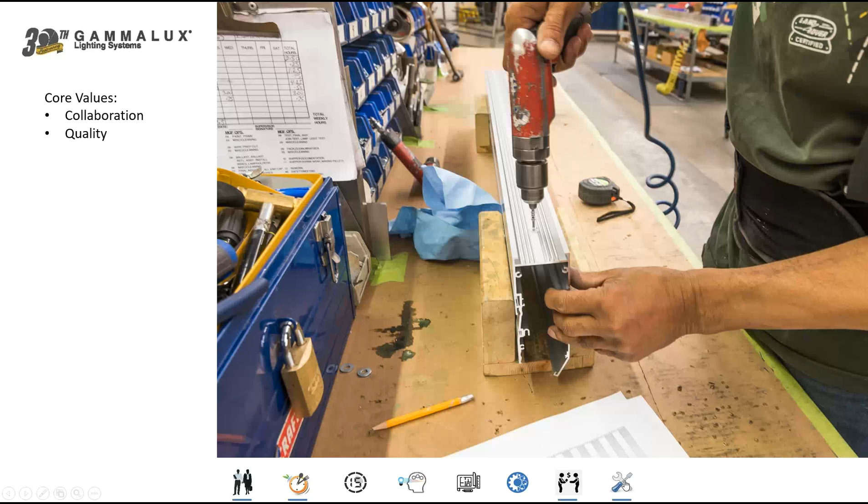Quality, of course, is a very important part of what we do. Obviously, we'll never get the second job if we don't do the first job right. So quality of construction, as well as the type of mounting methods we provide, is also quite important.

And, of course, integrity. Sometimes things go wrong at job sites. Obviously, somebody's going to have to pay for it, but Gammalux needs to be in the very center of those conversations so that we can come up with the best way to solve a problem, whether it's a mounting issue or fixtures not illuminating the way that they should, or aesthetic issues. And certainly, we want to step in and do what we can to minimize the damage on these things.

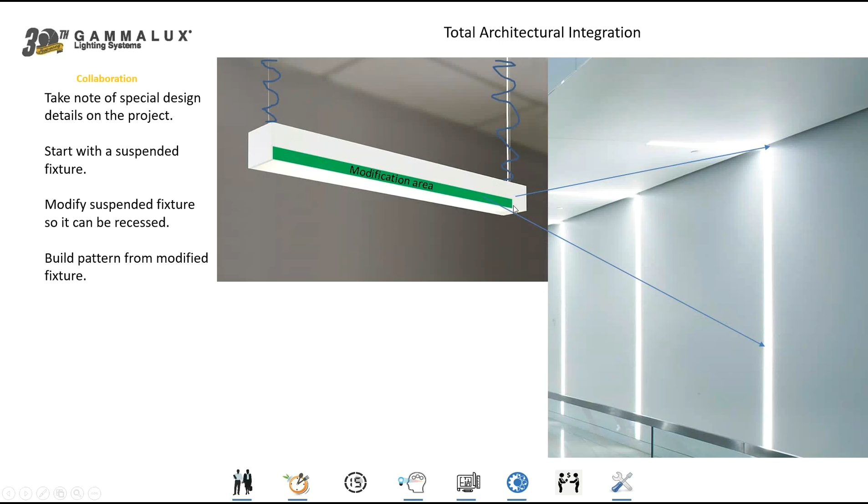So rather than using a recessed fixture in this application, what we actually do is we use a suspended fixture that we've modified just in the area where it's supposed to interface with the wall or the ceiling, but we didn't modify the fixture in the area that was going to be visible inside that little 3-inch gap. So once the fixtures are actually installed into the space, as a person is walking down the corridor and they look at the side of those fixtures, they see the smooth side of what used to be a suspended fixture rather than all the undesirable elements that are visible on the side of a recessed fixture.

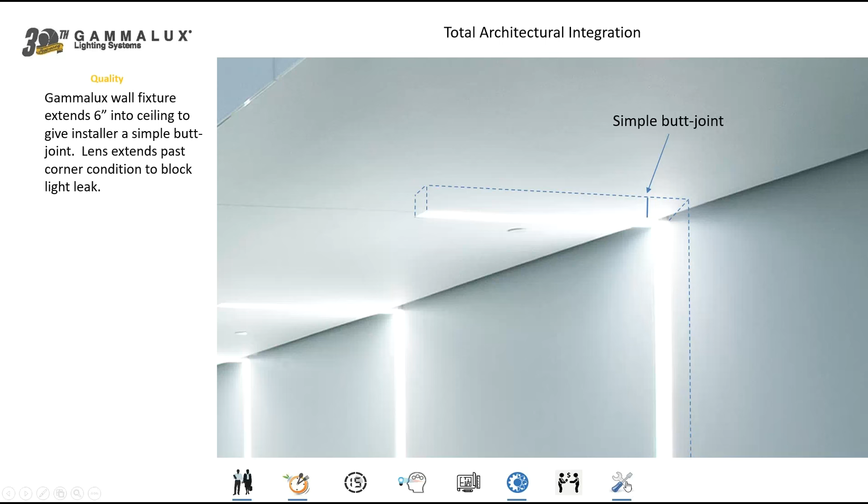By doing that, we're giving the guys in the field the most simple form of installation possible, while still maintaining the original design intent on the job. And so at the end of a job like this, everybody wins. Even though it was a very complex installation, we provided the tools that were necessary and the type of details that the installer needed so that they could actually do good work.

So what it creates is a lot of problems at the job site, of course, and if you don't order it correctly, you've got delays and you've got cost overruns, and this is not the kind of thing that's going to help you build your business. So what we do is we provide a special tool to the designer before the job even goes to bid, called a development drawing.

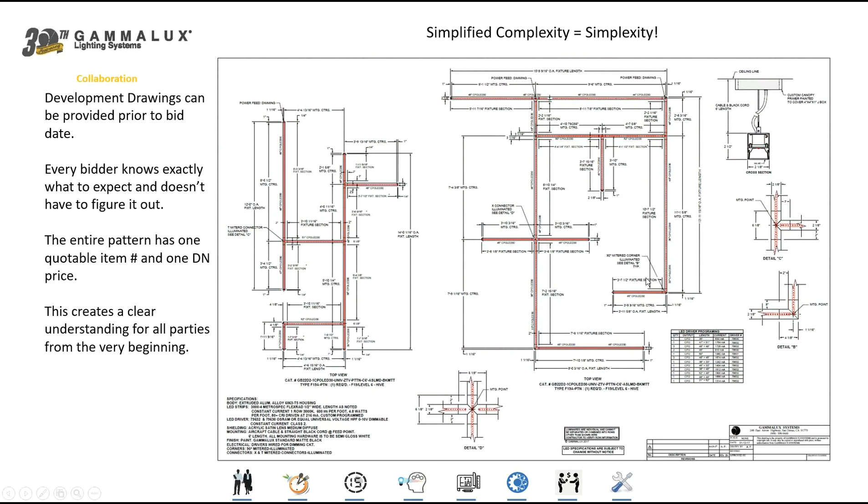We want to provide this development drawing which matches the details of their original design but takes all of that complexity and turns it into one catalog number for the entire pattern of fixtures and one quotable price. This way, when you get a hold of the bid package, you see that this is an engineered lighting system. It's not some kind of a beast that you have to try to figure out how to put it all together. And so by dealing with these patterns in totality in simple terms, like one part number for the whole thing, it actually simplifies the entire process all along the way.

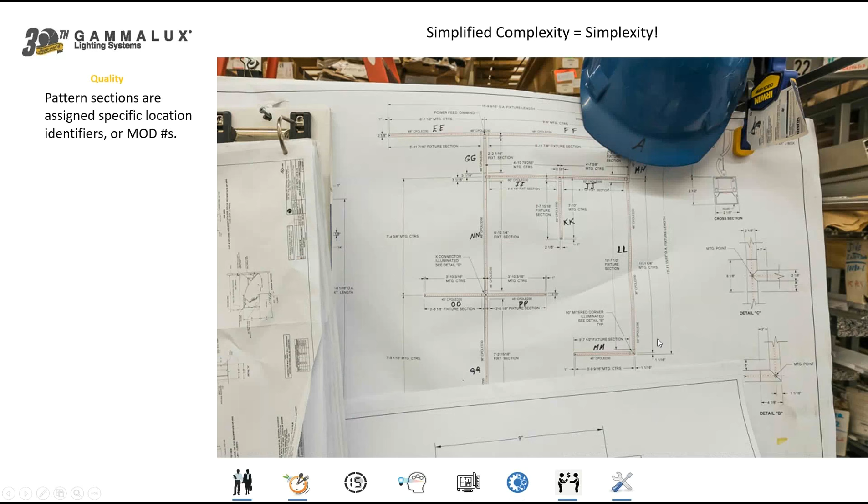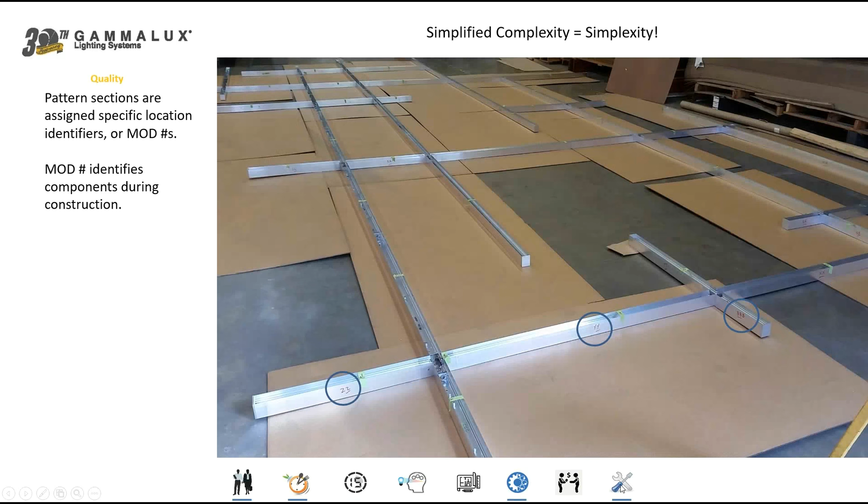Now, because this whole pattern of fixtures is one part number, we have to identify each component within the pattern, so we add these what we call mod numbers or location identifiers. And this mod number follows each component in this pattern throughout the entire production process here at Gammalux. As a matter of fact, everything we build is actually fully assembled twice before we pack it and ship it.

We do this first before it's painted to make sure that all the housings line up properly and the dimensions are correct and the mounting components all work the way that they should. Then we take the entire thing apart, paint it, put in the electrical, and reassemble the entire thing, checking every circuit, every battery pack, the occ sensors, the daylight harvesting sensors, even checking the fit and finish of the paint finish from one housing to the next. So we're very thorough in our methods.

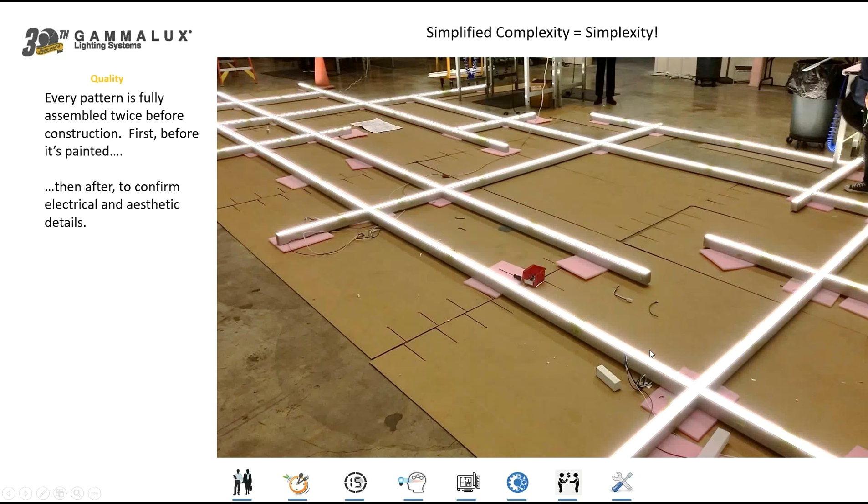And of course this means our lead time is a little bit longer than our competitors, but what we're doing is going through all the procedures necessary to ensure this thing looks and works the way that it should before we ship it out to you at the job site. Now, of course, each component, as I said, has its own mod number, so you'll know exactly where it needs to go. Now, each fixture is actually male on one end, female on the other end. So you don't have the problems of maybe spinning things around and now you're blowing circuits and such. So these fixtures can only be installed one way, which is really nice.

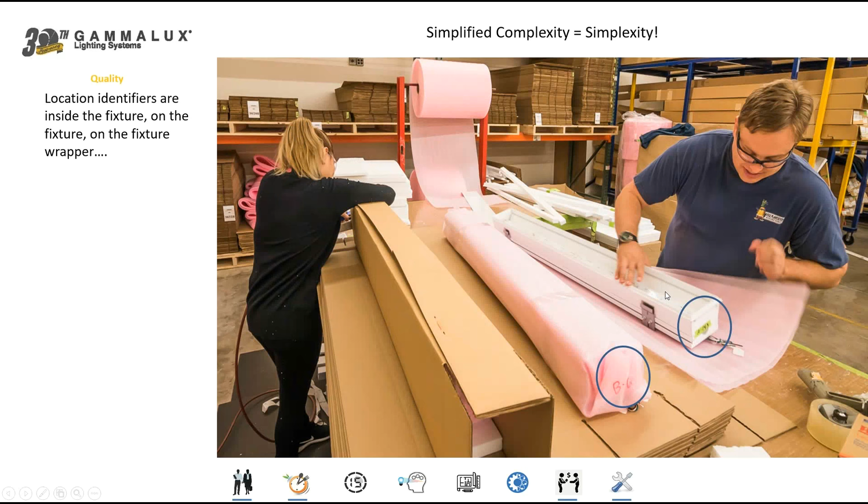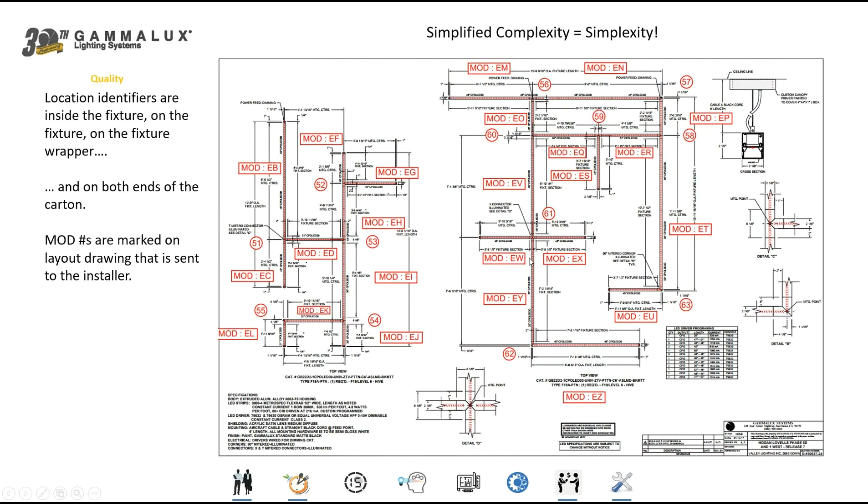Now, in addition to putting that mod number on a little sticker on the inside of the fixture next to the UL label, we also put it on the outside of the fixture, on the bubble wrap, and then on both ends of the carton. So if you're looking at this side of the pallet or that side of the pallet, you can see everything that's on that carton. Also, as much as possible, we actually put all fixtures for the same pattern onto the same pallet. Now, when we ship out those fixtures, of course, we're going to send out a layout drawing, and that drawing also will have those mod numbers added to it as well, so the guys in the field can know exactly where everything goes.

Now, in addition to all the fixtures for a pattern of fixtures, we will also ship all the fixtures for a continuous run of fixtures, again, on the same pallet. So we don't ship all the 4-footers on one day and all the 8-footers on another day, and the hanging parts are shipping out next Tuesday, something silly like that. We ship everything in completion on the same pallet as much as possible, and we'll even pack these for you per floor or per phase, if you like, so that you can keep your guys working as quickly and efficiently at the job as possible and keep them profitable.

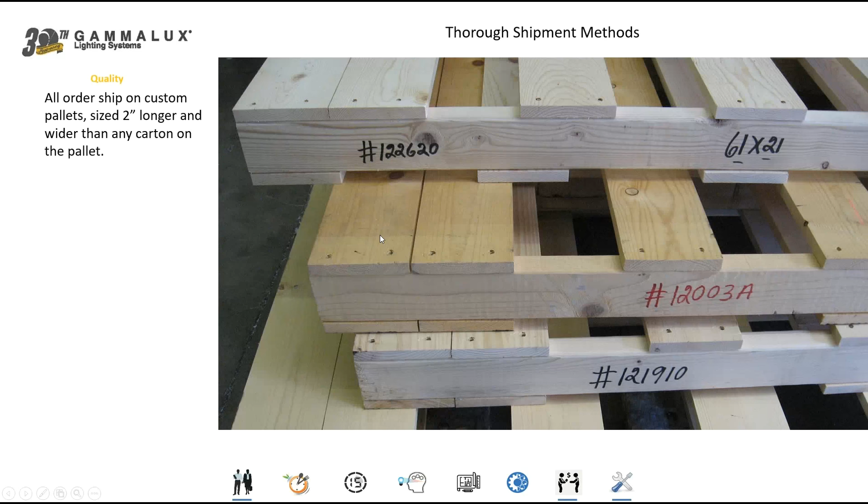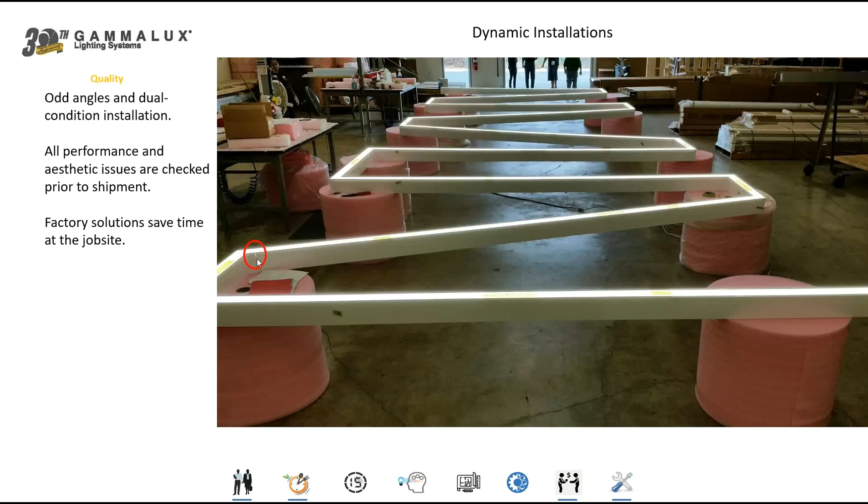Now, every job that we ship actually ships out on a custom-made pallet that's 2 inches longer and wider on all 4 sides than any carton on the pallet. So we do not get shipping damage complaints at Gammalux because of the way that we palletize our fixtures. Now, as I said, everything is built twice because you need to know that we're checking for fine issues like light leak here at the factory before the fixtures arrive on site, because the truth is you don't need to be spending time fixing problems with light fixtures at the job site. This is why we do it at the factory before they even ship.

So for one reason or another, the people who were responsible to order the product didn't order it in time, and that meant that they ran out of time to have the fixtures up in the gyp and then mud them in. So what they decided to do was to have us go ahead and build the fixtures with our cover flange on the bottom at the factory. And while we were building the fixtures, they decided, let's go ahead and put the gyp up, and we're going to cut the slots in the gyp at the same dimension as what Gammalux shows on the factory drawings.

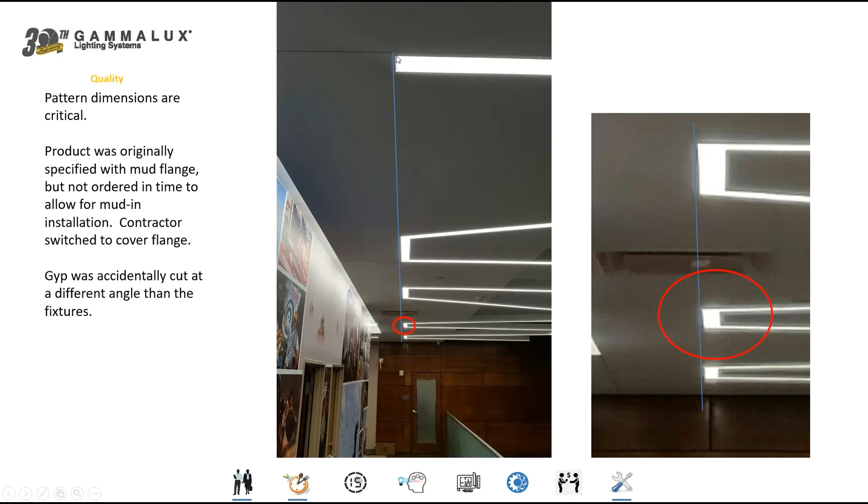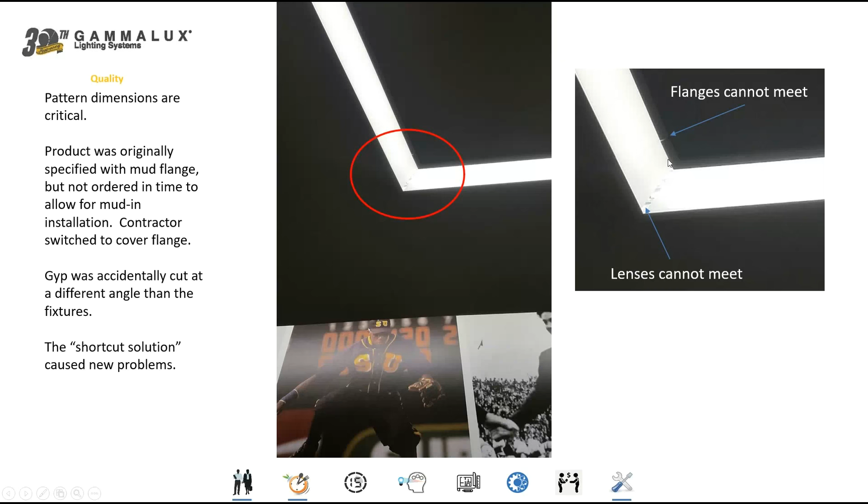Well, in theory that works, but in reality it didn't, and here's exactly what happened. If we draw a straight line, you can see the cutout that they made in the gyp was not the same dimension as what we built for the fixtures. What ends up happening is they had to hyperextend the corner of the fixtures in that location, and that made the lenses unable to join together, and it also created a gap in that flange that they thought was going to be the solution to their problem.

So what we want to do is avoid this kind of thing by working with what we call kind of a reverse timetable. If you can let us know when the product is required on site, then we can let you know by what date we're going to require the signature approvals on our shop drawings. And by doing that, we want to establish a clear understanding for everybody involved and clear expectations so that everybody can actually do their very best work.

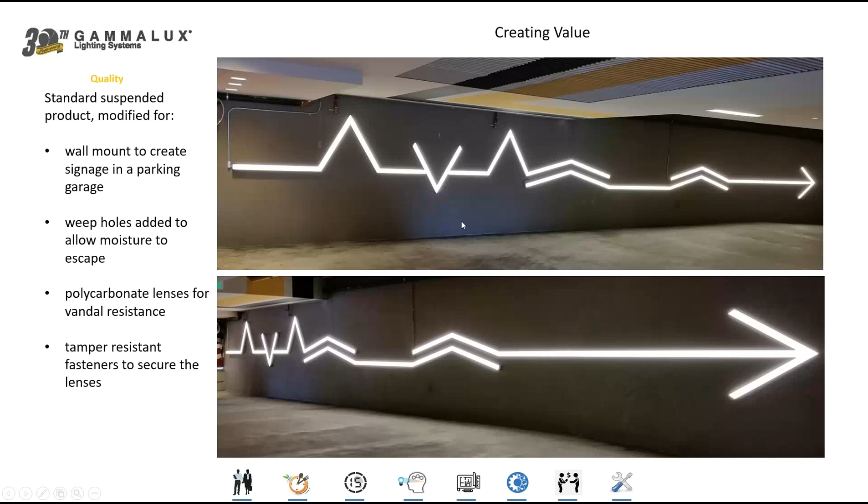Now, this pattern of fixtures here is not a custom pattern of fixtures, and this is not impossible to install. See, when we build a pattern of fixtures like this, we're actually miter cutting and welding these fixtures as L-shaped or V-shaped or T-shaped fixtures at the factory, so the installing contractor doesn't have to put together all these complex miter joints. We're building these as L-shaped fixtures so that the contractor is just working with a simple butt joint away from that corner. So even very complex patterns of fixtures, we're building them in such a way that the installers can work quickly and efficiently.

To my knowledge, we're the only manufacturer left that can still make a single piece 24-foot housing all one piece. And depending on the shape of that housing, if it's a tall rectangular, it has a lot of rigidity to it, we can support that entire fixture with just 2 cables. Now think about the labor savings. If you're doing a school full of classrooms and you've got 2 patterns of fixtures per classroom, how much time you're going to save when each of those 2 fixtures in the classroom is a single piece housing with just 2 cables to support it. So we're talking about a potential massive labor savings when you're using 24-foot single piece housings.

Now, when you order a 24-foot run from Gammalux, we don't automatically make it a single piece. It's going to be 2 12-footers or 3 8-footers. But if you order it specifically and it's specified that way as a 24-foot single piece housing, that's exactly what we're going to build. But of course, before we even start building, we're going to call you and ask, how are you going to get it in the building? All right. So obviously, we've got to make sure that whatever we build can actually be installed. But the benefits are extreme.

See, if you've got multiple joints in a continuous run of fixtures, if any of those joints are sagging, then you're actually going to open up the bottom of the joint of those fixtures, and now you create light leak. Well, if Southwest Airlines has to move in tomorrow, you don't have time to go back and adjust all those hanging points, and then, of course, you're going to suffer. So by making fixtures in longer housing lengths, it eliminates unnecessary joints and allows your work to look much better than if you'd used anybody else's product.

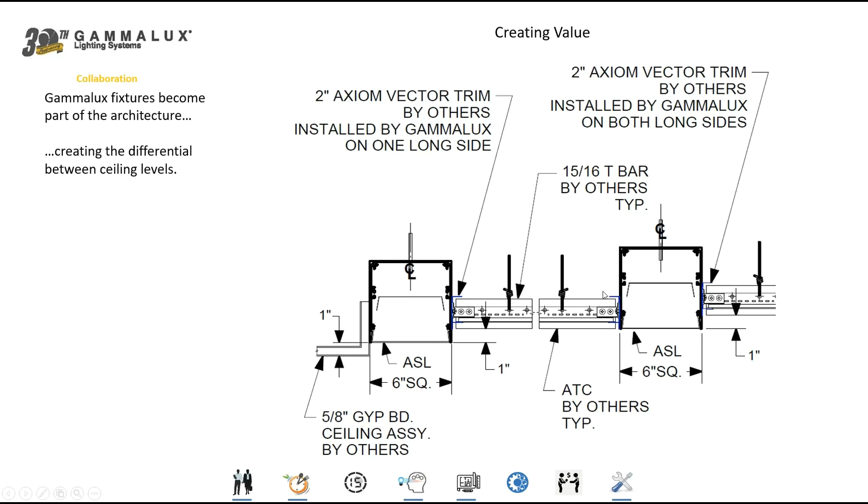By doing that, we're allowing the grid to just snap right into the sides of our fixture, so it actually speeds up the installation of the fixtures and the grid and allows everything to be suspended independently while still interfacing with all those different pieces. And by doing this, we're allowing the installers to use the components that they already know, so they don't have to spend extra time trying to figure this thing out. So we can actually help others to get their jobs done faster and still create very dynamic installations in a space.

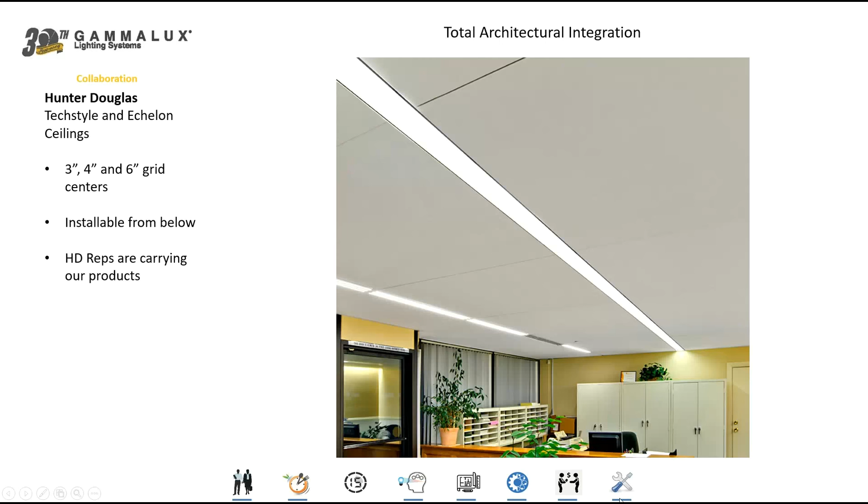In fixtures where we want to be flush with the bottom of special ceiling components, this is the Hunter Douglas Techstyle ceiling where the panels are 1 1/8 inches thick. So we drop our fixture 1 1/8 inches below the bottom of the grid so that it's consistent with the ceiling line, so you don't have fixtures up high and ceiling panels down low. So we ask a lot of questions about ceiling systems.

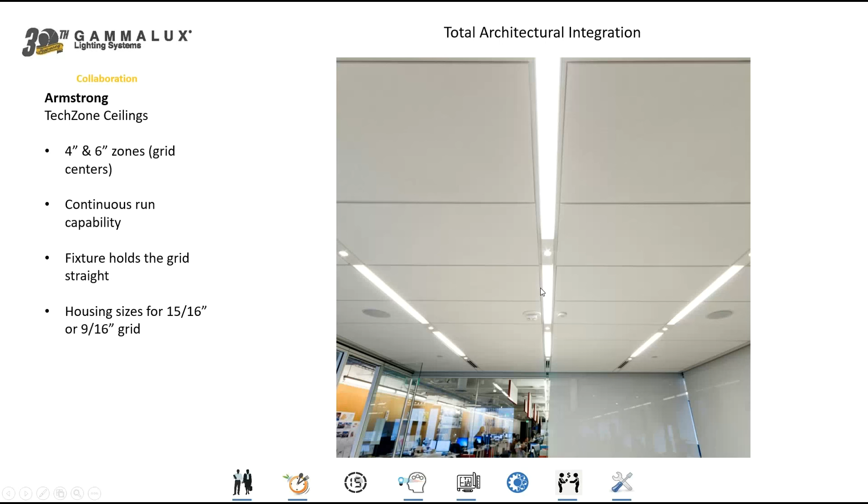This is the Armstrong TechZone ceiling with the 6-inch zone and also the 4-inch zone. We can make our fixtures in continuous runs in that 4-inch zone and actually eliminate the need for that U-shaped yoke that holds the grids together, because our housing is rigid aluminum extrusion with brackets on the side. The housing is what holds the grid straight, so we don't need that U-shaped yoke provided by Armstrong.

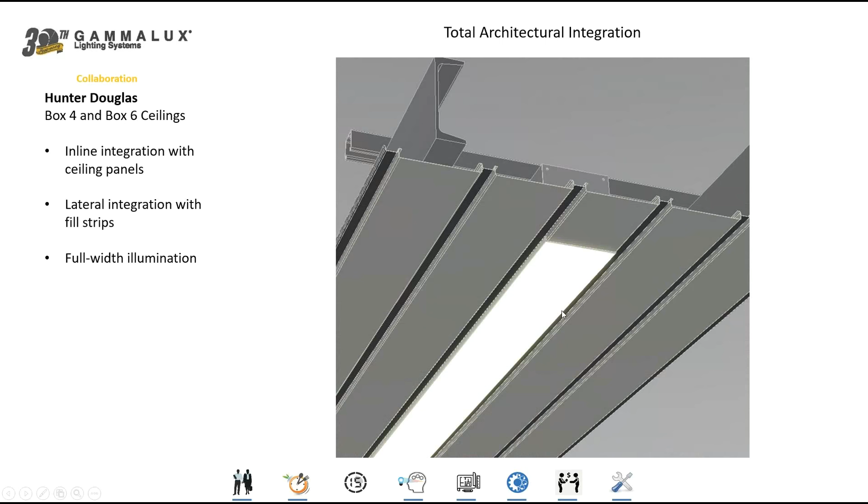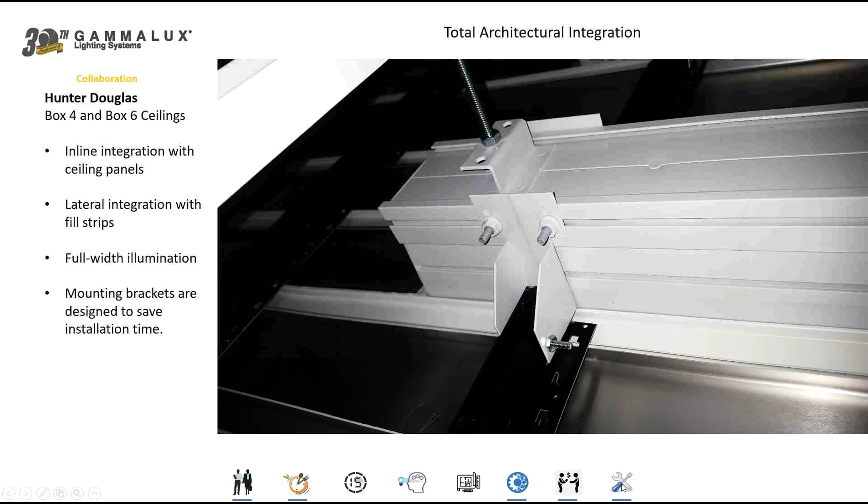Here's the Hunter Douglas Box Series ceiling where they've got metal panels. Well, what we did here is we made our fixture the same width as the panels, and then we put a joiner spline on the end of our fixture to interface with the cut panel in line with our fixture, and we use the same brackets on the top of the fixtures that are necessary specifically for that particular ceiling system, that universal carrier that Hunter Douglas uses, and that bracket slides anywhere along the side of the fixture that the guys in the field need it to. So we're giving them the components that are helping them to work quickly and efficiently without having to bang stuff together or beat to fit, which is never a good solution.

Now, we don't do these one-size-fits-all kind of applications, because the truth is one size only fits one and the rest are compromises. So what we do is we ask a lot of questions about the ceiling system. If we need to go back to the specifier or the distributor, we do that so they can find out what's the ceiling system being used, and then we build the fixtures accordingly so you don't have this kind of problem hurting your reputation and harming your business.

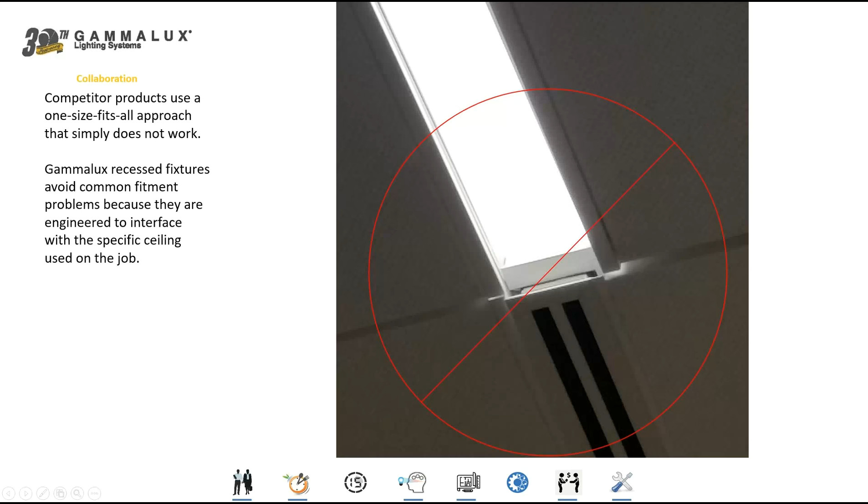Now, when things do go wrong, and sometimes things do go wrong, we want you to know you can call us directly. Our phone number is on all of our literature. It's on the shipment of the fixtures. Obviously, we want the sales office and the distributor involved, but when you need answers right now, you are absolutely free to call us, and we answer the phone, and we're going to jump in and come up with the right solution to your problem. We believe in conscientious, responsible manufacturing, and that also means answering the phone and helping people when things go wrong.

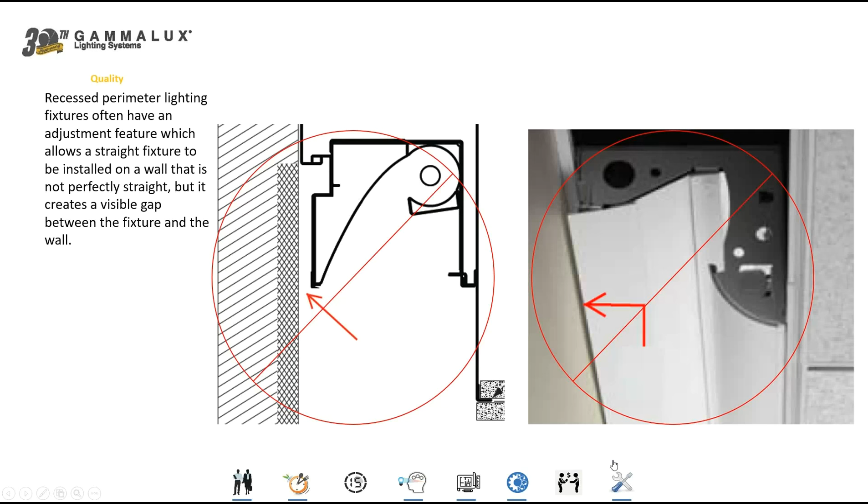Perimeter lighting systems, if you have any experience working with perimeter lighting systems, you know they're an absolute beast. They're so difficult to work with. They oftentimes have very poor illumination on the wall, and they don't fit well into the space, and they can't be built to exactly the length that you need, and they don't interface properly with the grid or the gyp ceiling, and there's gaps between the back of the fixture and the wall. There's all kind of problems associated with perimeter lighting. We solved every single one of those. We spent 18 months engineering our product to solve all those problems.

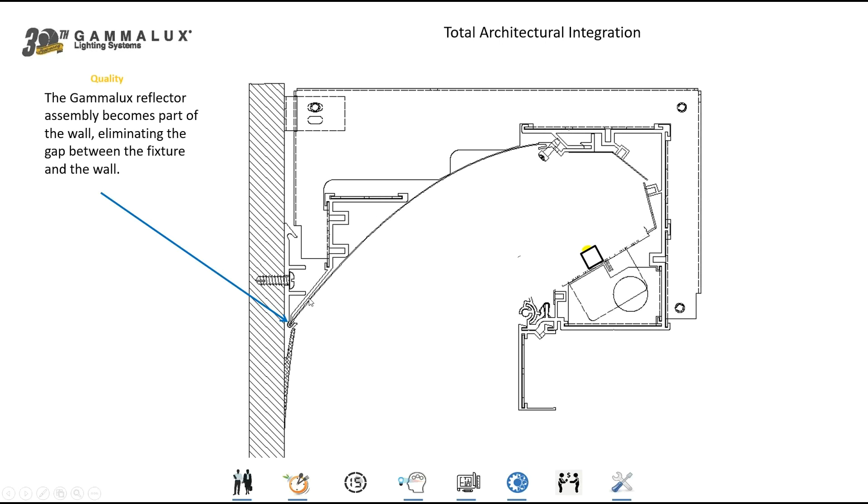The first problem we solved is the visible gap between the back of the fixture and the wall. We actually created a mud flange that gets mudded over the unfinished wall just above the ceiling line here. So this is mudded over and painted, and now there's this groove in the bottom of that mud flange that actually receives the reflector assembly from our fixture and eliminates the gap between the back of the fixture and the wall. So the quality of your construction is always beautiful.

Now, we also made that trim piece with the mud flange on it so it could be flipped upside down in the field, and so the very same piece can be used in a non-mud application where you don't want to mud up. Maybe you're using a brick wall or a wooden wall or a stone or a metal wall. You're not going to mud over any of those materials.

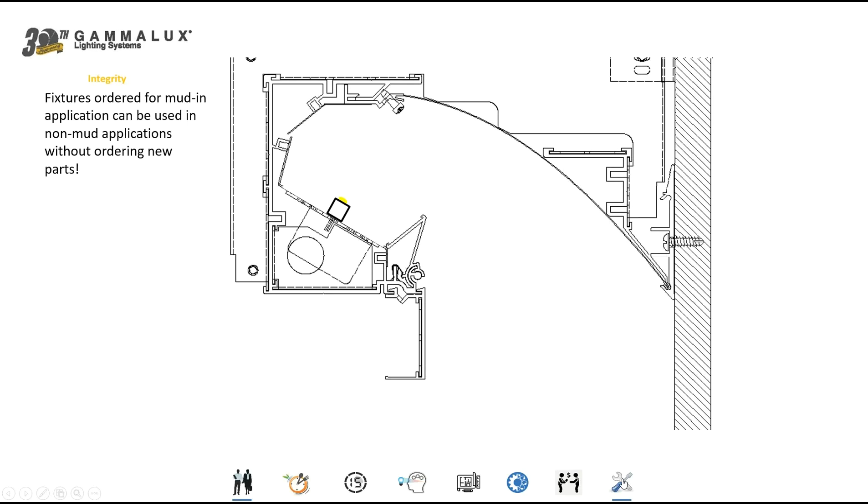So rather than having to order up a new component from Gammalux, you can just flip that wall trim upside down, and now you can use the very same trim in a non-mud application. It helps you save time and adapt to changing conditions in the field on the fly.

Now, the PDF version of that particular brochure, the Perimeter series, has this chart right here where, say for instance, you need a 6-inch wide fixture that has a lamp barrier in it, so you can't see the reflection of the lamps in a shiny mirror or something like that. Well, if you click on that little checkbox, it's going to hyperlink you to automatically open up the spec sheet of that particular product. So it's a nice way to find our products based on your particular uses on a job.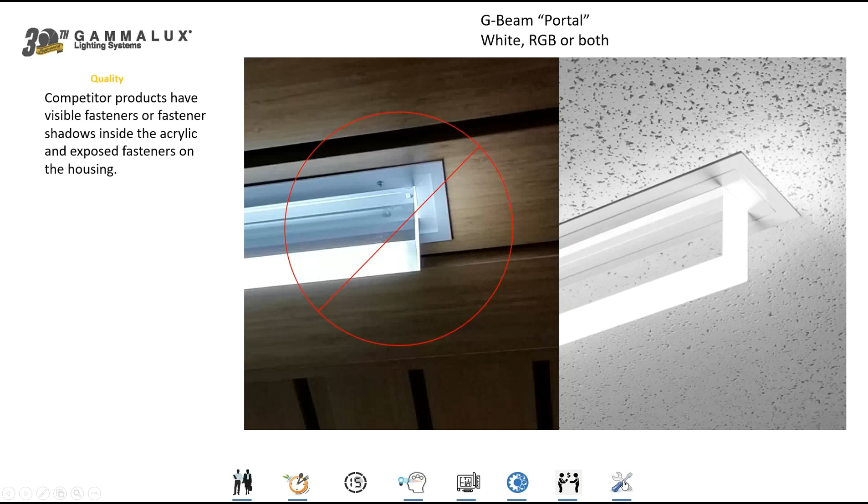Now, we were not the first manufacturer to market with this product, it was actually the Mark Finn that was the first product on the market, but we saw some problems with their aesthetics, exposed fasteners and fasteners visible through the acrylic. It's not the kind of thing that's going to make you look good at the end of that job, right? So what we did is we cleaned up the aesthetic of the fixture. We got rid of the exposed fasteners. We got rid of the fasteners visible through the acrylic. So the truth is, if you're not going to be first to the market, you have to do a little better than the original guys.

Now, these fixtures are often ordered and installed as individuals, an absolutely beautiful and dynamic installation, or in continuous runs where there's just a little bit of a gap between those acrylic panels, but the gap is always consistent throughout.

We can interface our fixtures with the gyp ceilings with either a cover flange or that beautiful mud flange that we have, or any kind of grid ceiling, metal ceilings, wood, gyp, fabric, foam, pixie dust. It doesn't matter what the ceiling systems are made of. As long as we can find out what it is, we will modify the fixtures as necessary in order to integrate properly with that ceiling system. I want you to understand, those are not custom fixtures. It's just a simple modification, and we don't charge extra for that kind of stuff.

We offer color changing on DMX control in all of our LED fixtures. And if you need white on a separate circuit, we're glad to do that, so you've got total control of that white circuit. We try to stay away from RGBW because the W, the white element in those fixtures, tends to be very dim and kind of weak. So we go RGB plus W in our fixtures, where the W, the white, is on a separate circuit, and that works out very well.

The moral of the Gammalux story is really all about integration into the architecture, but we do it in such a way that we can give the installing contractor the most simple type of installation possible, and we do it in such a way that makes things easier for the distributor to order.

Now, we love having coordination meetings about very large projects. We love having people come visit us so that we can go through all aspects of those projects and make sure we're not missing anything. If you like, we can have you come out and visit us while we're actually building the fixtures for your project, so you can have a clear understanding of how they're constructed, so that when you get back out to the job site, you're working with something that you're already familiar with.